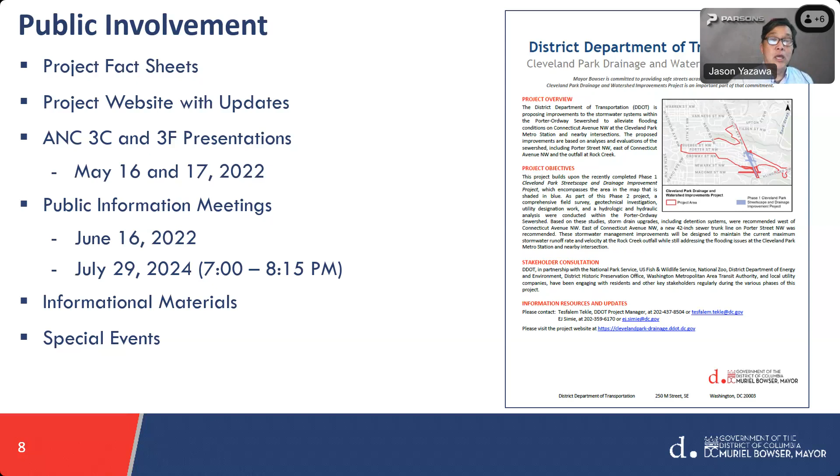We've also conducted public presentations both to the general public back in June 2022 and also before the ANCs 3C and 3F in May of that year. Tonight will be our second general public meeting for this project. We will continue to generate public project materials and upload them to the project website, such as this presentation you're reviewing tonight. Finally, the project team is open to participating in special events, so they all can get a better understanding of how DDOT is proposing to address the flooding issue. With that, I would like to actually hand it over to Prakash Patel.

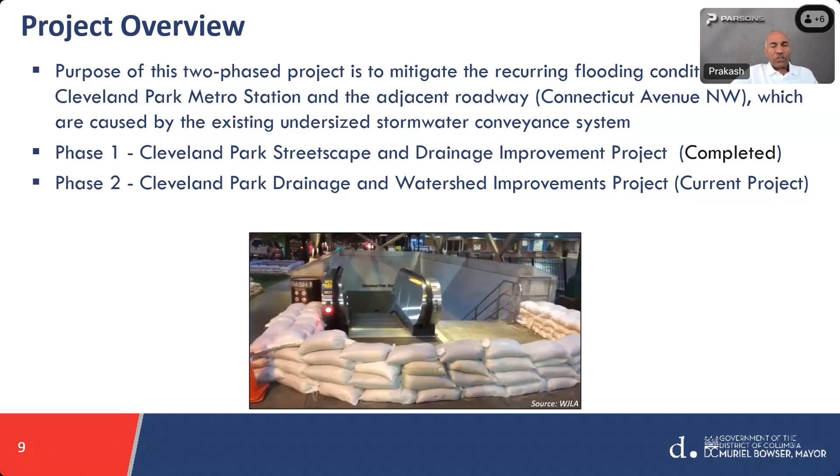Next slide, please. So as you can see, the red boundary shows the Porter Ordway sewershed boundary, while the light blue color is phase one. As I indicated, phase one has been constructed. All the improvements have been done along Connecticut Avenue and adjacent intersections. Phase two will be studying and analyzing that entire sewershed area bounded with the heavy red line. Next slide, please.

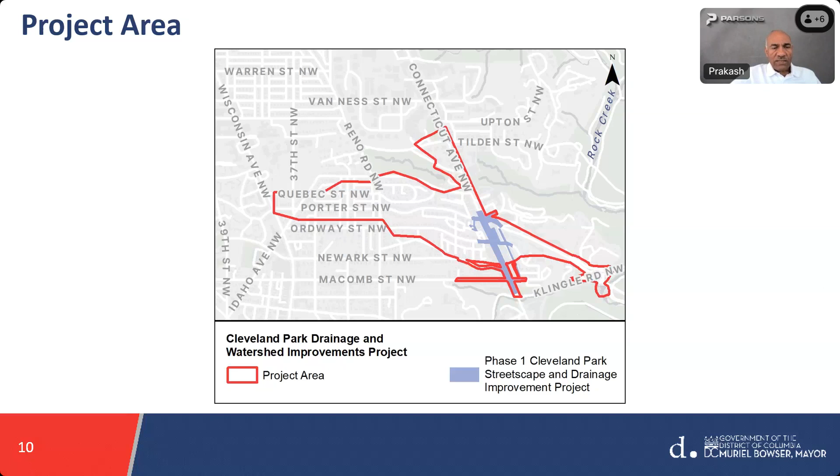I wanted to give you an idea of the adjacent sewershed watershed boundaries. On the north, as you can see, that's the Melvin Hazen sewershed, and the entire runoff from that area drains into an outfall into the creek that ultimately drains into Rock Creek. Further south is the Macomb Newark sewershed, and that also has an outfall, as you can see with that little solid green area.

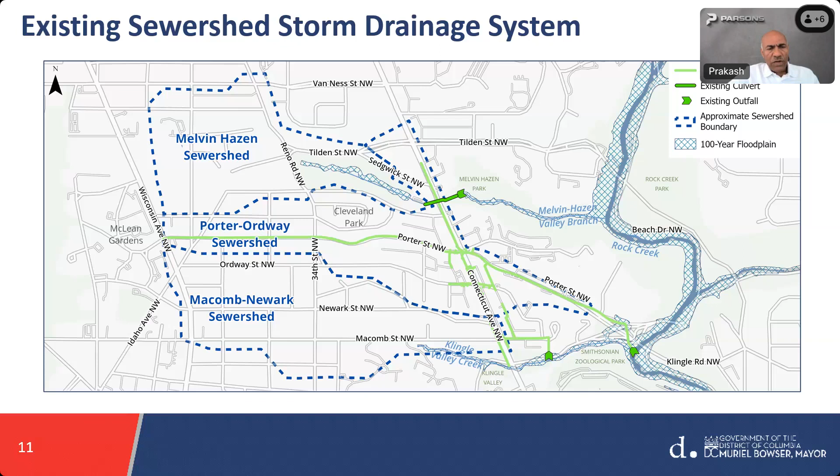While the Porter Ordway sewershed has a drainage system that ultimately drains directly into Rock Creek, and our focus for phase two is that dashed middle portion of the watersheds. Next slide, please.

So as we discussed back in summer of 2022, we did an initial study. We further analyzed this in much more depth, and what we are showing on this slide is the finding of our analysis. This sewershed area is 170 acres. It's a huge area, and the largest storm drainage system, running parallel to East Porter Street on the east of Connecticut Avenue, is 54 inches. And what we are finding is that sewer itself can handle only 350 cubic feet per second. So you can imagine how much volume that pipe can handle.

While based on our analysis, we are finding that the 15-year storm, which the District normally designs all storm drainage systems for, is generating about 900 cubic feet per second. So you can see we have 900 cubic feet of runoff coming in, while the existing system can handle only 350 cubic feet. So we know that we have to overhaul the existing system. It's capable of about 1/3 of what we are generating.

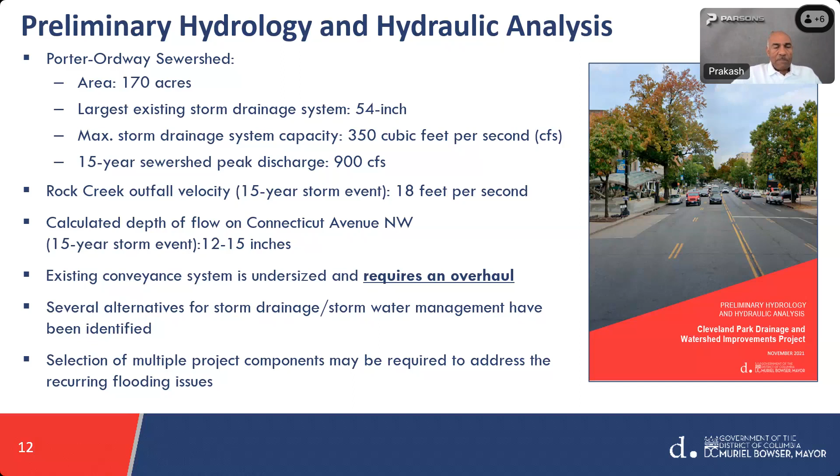So here are the major components of our recommended improvements. We are updating catch basins, so a lot more surface runoff can go through the openings of the catch basins and down into the underground conveyance piping systems. And we are finding that the underground conveyance piping is also not sufficient, so in a lot of areas we are enlarging it, making bigger pipes. We are putting in many catch basins. There are about 160 catch basins that we studied, and we are going to make improvements on those.

At the same time, because of the bigger issue, we are putting in extended detention systems, which is nothing but a large, 96-inch diameter pipe, and that will retain the flow during the peak runoff, and then it will convey back into the existing systems.

We are also recommending to put in a 42-inch trunk line, an additional trunk line in addition to a 54-inch line to handle the runoff coming from the east of Connecticut Avenue. We are also considering the green infrastructures. At the same time, we are making sure that we are not adding any more peak flow into the Rock Creek, so that outfall remains

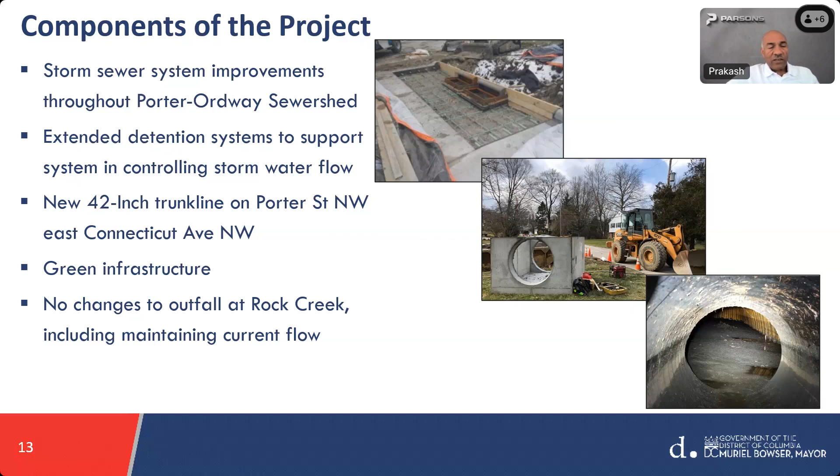intact. Next slide, please. So I would like to have Brian Smith, who is our hydrology and hydraulic analysis expert, lead. He is going to provide you all of the details of all the improvements. Brian? Thank you, Prakash. So I'm going to discuss some details of the project, and primarily I'm going to compare the project as we presented in summer of 2022 to the level of detail that it is now.

So this slide is showing the previously shown design back in summer 2022, and you'll note in the legend the various improvements that summarize the 4 different categories of improvements that the project will provide. So the brown color indicates what we had shown previously for storm sewer improvements. That's the first component. You see the brown lines and dots indicate the catch basins and pipes we had proposed.

The second component was the extended detention systems that Prakash discussed. Those carry over to what we're going to currently present, but there's some differences which I'll discuss later. We had 3 extended detention systems indicated by the orange lines there. The first one's off Porter Street, the second one being just to the left of Connecticut Avenue, and the third orange line being all the way to the right, close to Rock Creek.

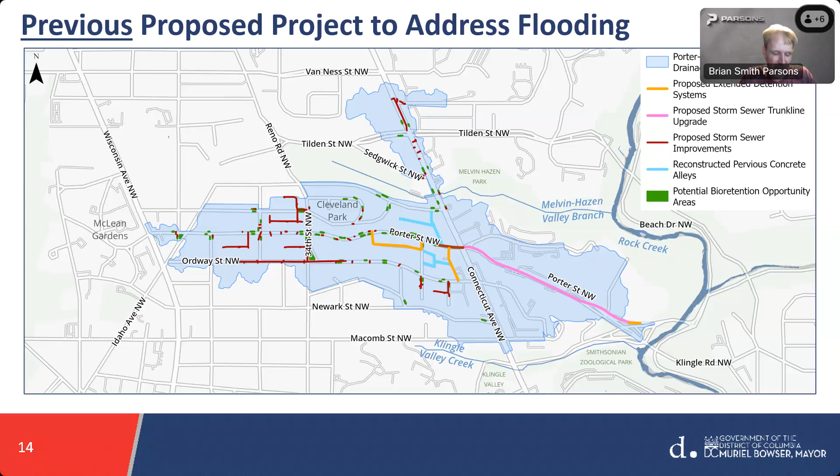And then the fourth component are the green infrastructure practices, and that's indicated by light blue and darker green. The light blue being pervious concrete alleys, where we propose to reconstruct alleys with pervious concrete, and the darker green being 73 bioretention areas, so streetscape bioretention areas that many of us are now familiar with. The green infrastructure was to provide infiltration of some of that stormwater runoff into the soils and thus reduce runoff into the storm system. Next slide, please.

Okay, so that previous presentation compares to what we're doing now. And just a couple things I want to point out. So we still have the four main components that we presented previously. The first component being the storm sewer systems indicated by the brown lines. You see that as we advanced to 65% design, we determined that there were additional areas that needed storm drain piping and inlets. So that compares to what we had before. There's more storm drain systems, specifically on Ordway Street. As you can see there, a lot of brown line work.

The second component were the extended detention systems indicated in the yellow. Now those limits remain carried over from what we presented 2 years ago, but there is a difference, and the difference being that portions of the extended detention systems will now be installed by trenchless means, and what that means is they'll be installed underground without disturbing the surface of the pavement. And we decided to do that to minimize impacts to the surface, traffic, utilities, as well as adjacent properties.

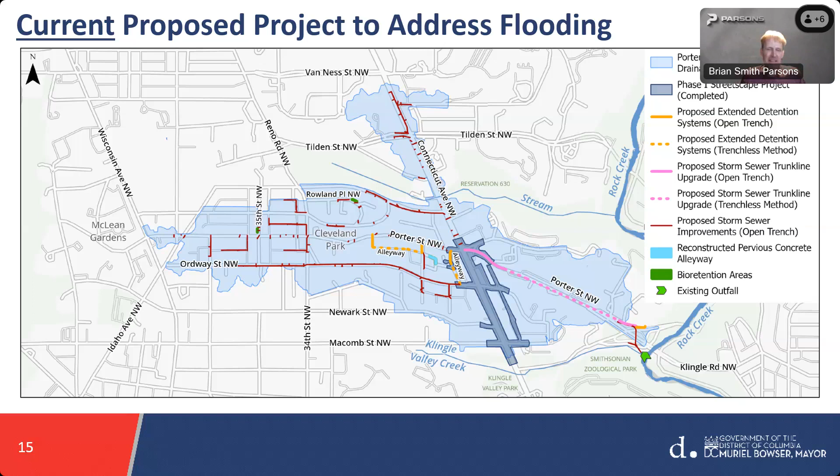And then the bioretentions indicated by the dark green, there's only 3 of those compared to the original 73. And there's 3 you can see with the dots. Okay, next slide, please.

Okay, so now I'm going to explain a little more about the extended detention systems and some of the differences compared to what we did before. So like I said previously, the limits are still the same. So this is extended detention system 1, and it's located off an alleyway that connects Porter Street to 30th Street.

So the yellow line work indicates the alignment of the piping that will comprise that system. And as you can see, a large portion of that will be installed by trenchless means, which is shown by the dashed lines. And this section view on the left gives a schematic of what that installation will look like. You'll note a 96-inch diameter pipe, which is intended to temporarily hold water and release it slowly, thus controlling the flooding. Next slide, please.

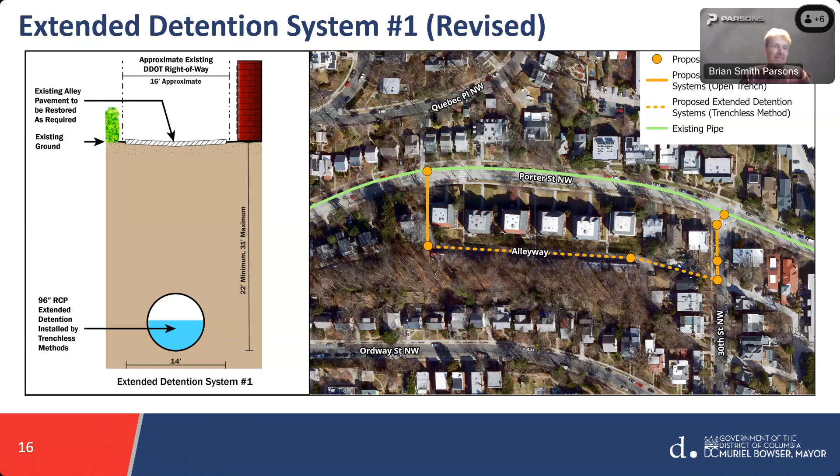This slide is showing extended detention system number 2. That one being located just west of Connecticut Avenue, and similar to number 1, this is located on an alleyway. And this alley connects Porter Street with Ordway Street. And just like the last one, you can see in more detail the portion that will be installed by trenchless means that's indicated by the dashed lines.

This installation is a little bit shallower than the extended detention system number 1. If you'll look at the section on the left, you'll see that the depth of this will be between 15 to 22 feet. Okay, next slide.

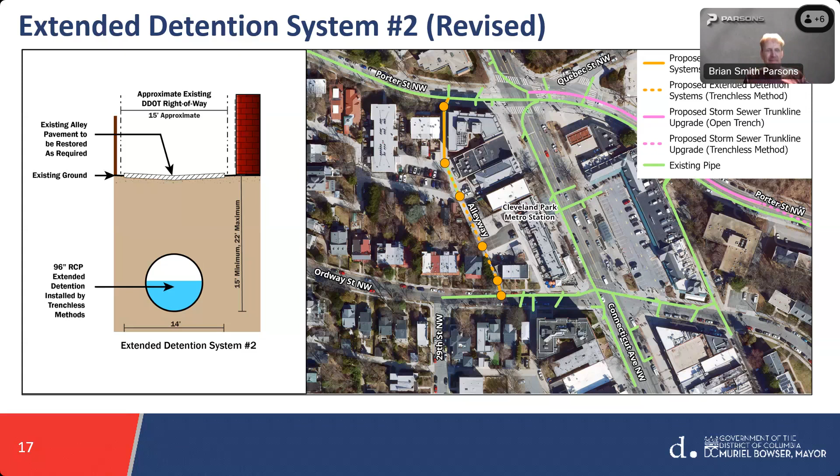Okay, this slide combines a detailed view of extended detention system number 3, along with the 42-inch trunk line. The section view on the left is a representation of the extended detention system, not the 42-inch. And unlike extended detention system number 1 and number 2, this one does not have any portion that is installed by trenchless means. It's only a short portion indicated by the yellow line all the way to the right of the picture view.

But more importantly, I just want to point out the 42-inch trunk line indicated by the magenta line work. So that gives you an idea of the portion, that 1,650 linear feet that will be installed by trenchless means, indicated by the dashed line there. The solid lines indicate the pipe portions that will be installed by conventional open trench means, which is a much smaller portion of that 42-inch relative to our proposed trenchless installation. Next slide, please.

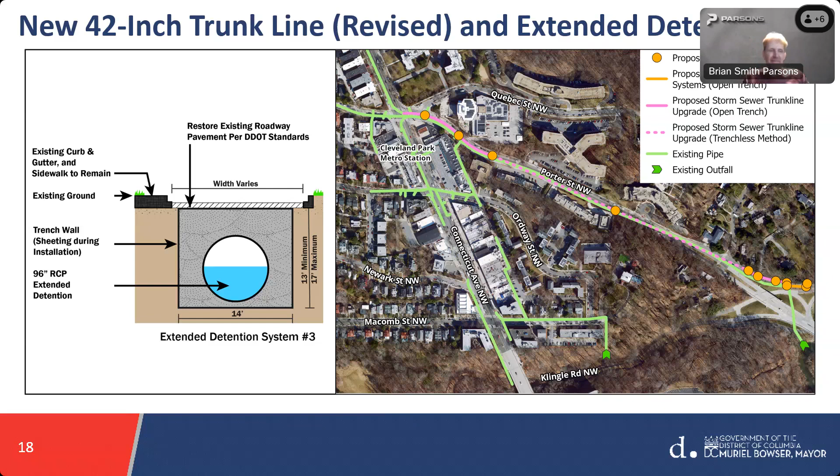I just wanted to show once again the green infrastructure, which is now a much smaller part of the project. This shows a schematic of the 2 practices that are still going to be part of the project. You see the bioretention areas, which are the streetscape installations that many of us have already seen. That compares to a permeable alley, which is to the right there underneath the teal colored car. The permeable alley looks no different than a conventional alley. It's just a reconstruction of the conventional pavement with a pervious material and some stone underneath. Next slide.

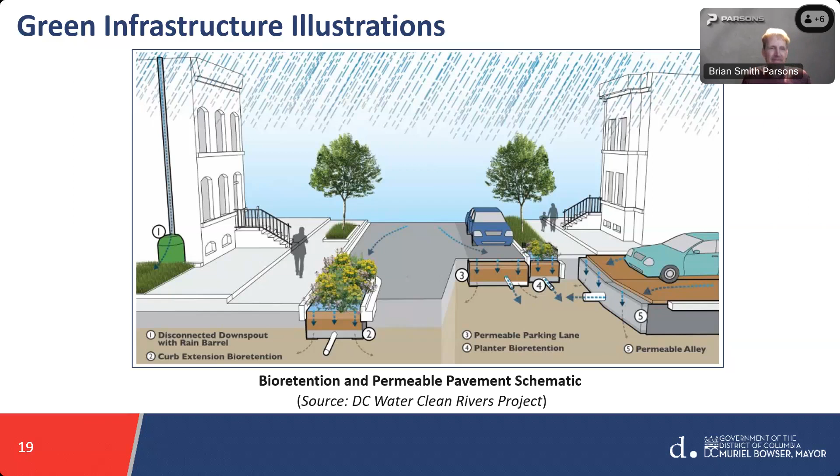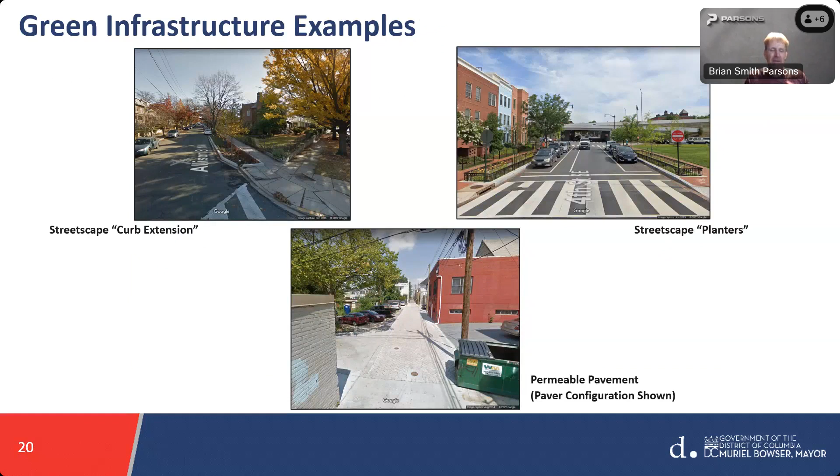And this shows some picture views of the practices. The streetscape bioretention being the top 2 pictures, and a sample of a pervious pavement alley being the bottom picture. Next slide. Okay, then for this, I'm going to hand it back to Prakash to discuss the different means of trenchless installation that we are proposing.

As we saw in the previous graphics, all of the improvements are within a public space, i.e. within the street or alleyway right-of-way. Some places those right-of-ways are really tight, and to minimize the surface impact, as Brian mentioned, we are recommending trenchless methods. There are many means and methods of doing a trenchless piping installation. And I'm going to go over a couple of them that we are recommending for the EDS, extended detention systems 1 and 2.

As well as that deep piping system, we have a 42-inch trunk line along Porter Street east of Connecticut Avenue. We did geotechnical explorations, and we are finding that the soil is really hard. We encountered rock in some areas. And so our recommendation, based on the size of the pipe and the location of the pipe, is that we need to use trenchless methods.

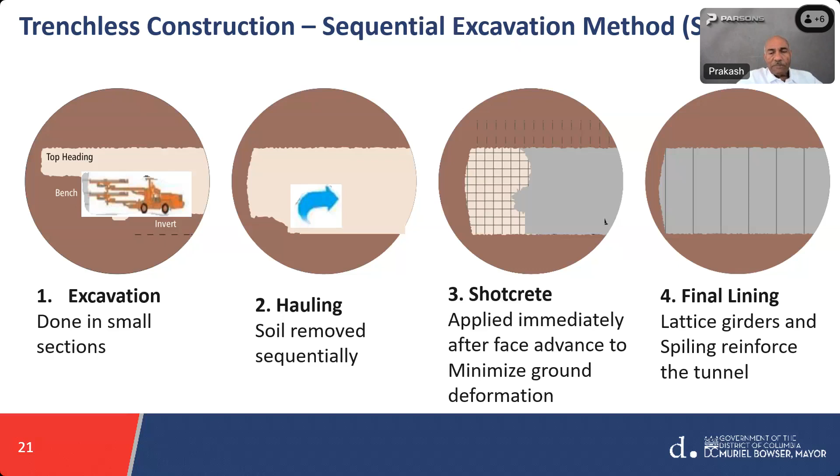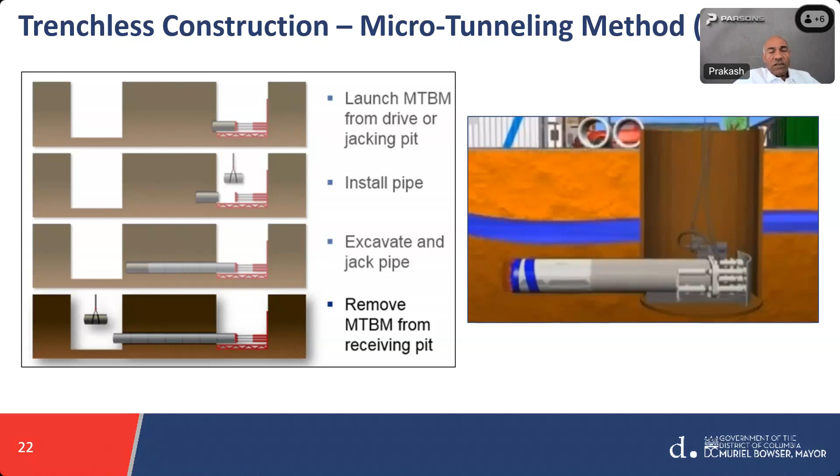This gives you an overview. The photo is really zoomed in, but you can see at the bottom of the pit is an MTBM, microtunneling boring machine, and it jacks through the soil or rock, and it occupies about a lane width on the surface where you have a jacking and receiving pit. Next slide, please.

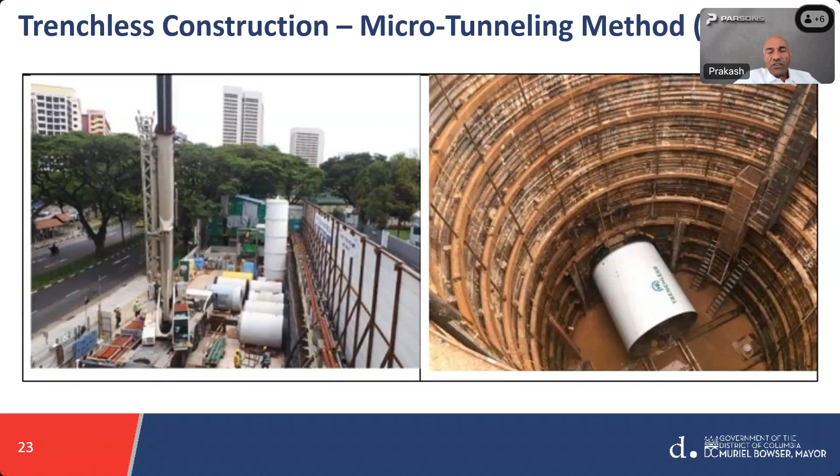I would like to have Jason go over these environmental considerations. Jason? Thank you, Prakash. Very early on in this project, the team collected environmental resources and information in the watershed, such as historic properties, parks and recreational resources, water resources, visual and aesthetic conditions, and we compiled this information into an inventory report, which is available on the project website if you'd like to review the information we collected.

As Brian said earlier, upon completion of the project, all affected streets will be restored to their pre-construction condition. But as Brian also said, construction impacts are really unavoidable. Therefore, we plan to institute best management practices to minimize such impacts to the community. Despite the extensive nature of this project, the actual work will be done block to block, not all at once, so the need for parking restrictions will be minimized.

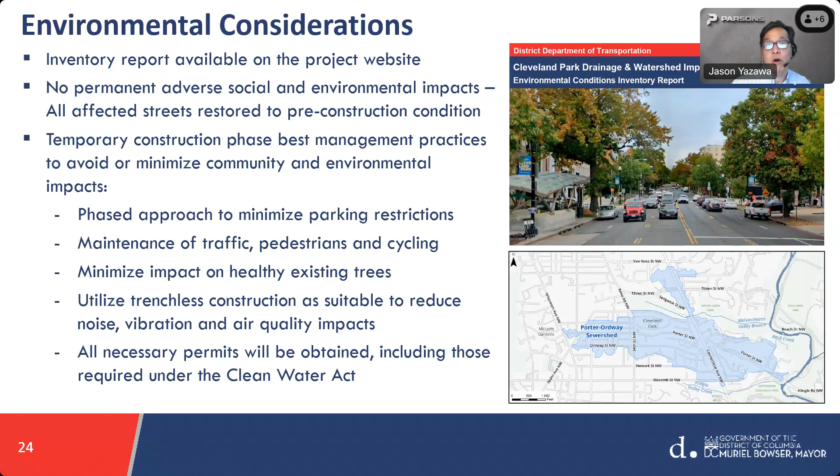And finally, all the required permits will be obtained by DDOT or the construction contractor, including stormwater management during construction, which is a requirement under the Federal Clean Water Act. Next. And so what happens next? I would like to turn that over to Tess.